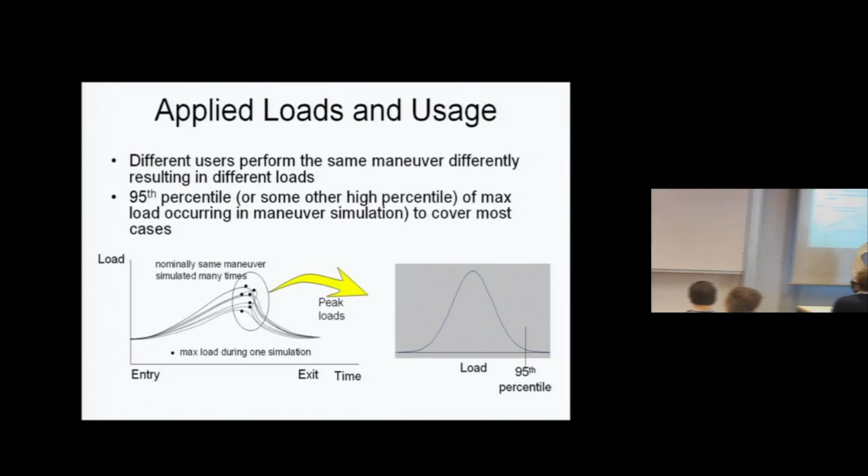Your material, even if it's supposed to be exactly the same day to day coming from the vendor, will never be exactly the same. In fact, you buy it with a specific range in terms of properties, and the vendor guarantees that it stays within these properties, and if it doesn't, you reject it and you get new material and so on. So the raw material in and of itself has some variability because the microstructure is not consistent enough to give you the exact same stiffness, let's say, and the exact same strength.

Manufacturing, especially if it's based on humans manufacturing, involves all kinds of human error in terms of the sizes of the parts and how they are located, the orientation of the fibers. So that introduces error, and there are all kinds of other factors. Even if you were doing it with robots, you still have some variability. So that means you have a scatter in your specific properties, which will include this raw material variability.

But it's also sensitive to, there's also one over there if you want.

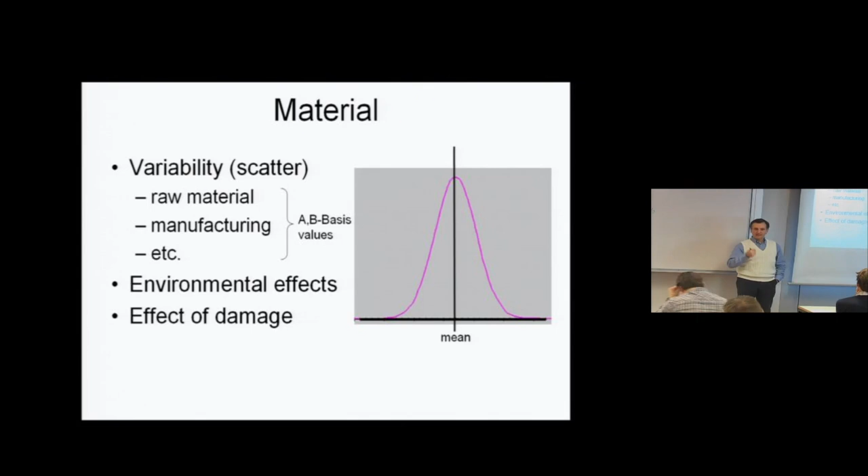It's also sensitive to environmental effects; composites especially are much more sensitive to higher or lower temperatures than room temperature and the amount of humidity that's been absorbed. And of course, what kills everything, or what makes composites not the winner in every case, is the effect of damage. Any kind of damage that in a metal at most would be a little dent with localized yielded structure, in a composite could reduce the strength by as much as 50%.

Obviously, you cannot take the average value, because if you take the average value, then there's a whole bunch of material coming in with strength lower than the average that you could be using, and you had assumed the average value, and obviously you are being unconservative. So there are two values that are statistically defined, the so-called B basis and A basis. And those are the values we use for design.

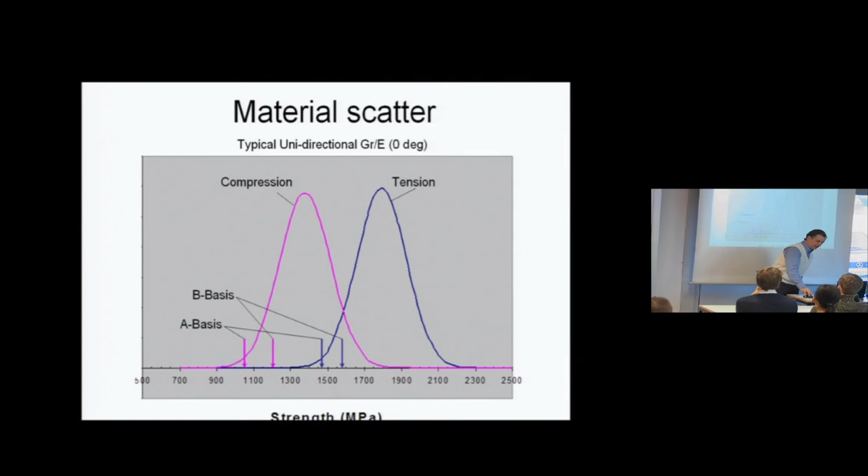And they are, in fact, dictated in the design process by both the certifying agencies and the manufacturers of the design. The B basis is the 10th percentile. Basically, 90% of the tests you would ever do on that material would be higher than that value. And the A basis is the 1 percentile. So 99% of the tests you would ever do would have higher strength.

Typically, the A basis is used for single load path primary structure. So if it's a blade and you lose the blade, you lose the aircraft, then that's an A basis design. If it's a skin stiffened structure and it's just a local failure, you can definitely redistribute the load, so it's like a multiple load path or a slightly redundant structure. In those cases, you would use the B basis. And you will be seeing those in your homework.

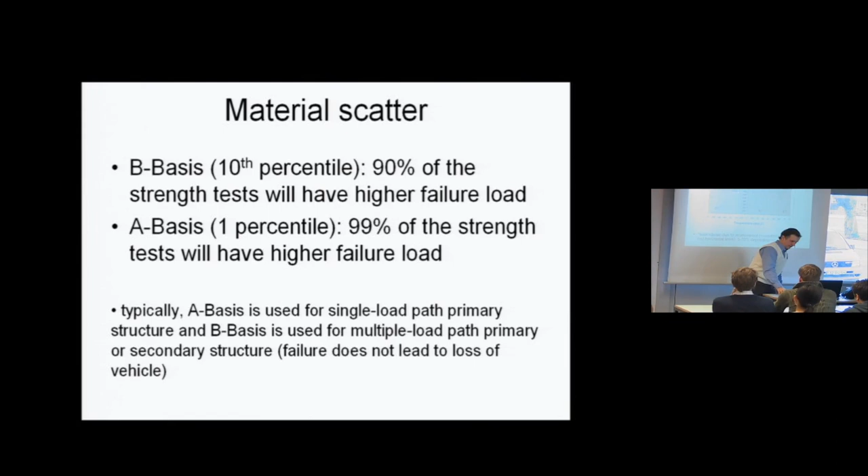When I was working in a program designing an all-composite airplane, the Starship at the time, this was 1984 through 1990, climatic data around the world wasn't readily available. So we actually had to contact the Meteorological Survey of the United States to give us information for the entire world, and we found that the most humid day-in, day-out place in the world is the island of Guam, which is actually pretty nice because it's 85% relative humidity. The only problem is that it stays that 360 days a year, unlike Florida, which can get to higher humidity, but there are some days that are drier.

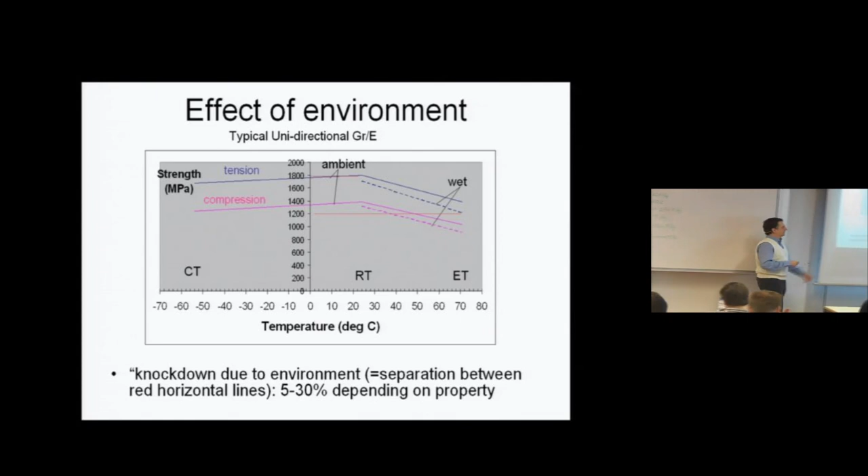So the damage on the other side, anything that you can do to the composite structure will actually affect it. So you can have things like holes drilled on purpose, lightening holes or fastener holes, or by mistake because you dropped some screwdriver and it went through, or some dignitary with very spiky heels walking through the structure with very thin skins. It's happened, and it happens, and you have to design for that. But besides that, you have porosity, basically tiny voids distributed through the structure. You have delaminations, which are bigger voids, that are separation between the layers.

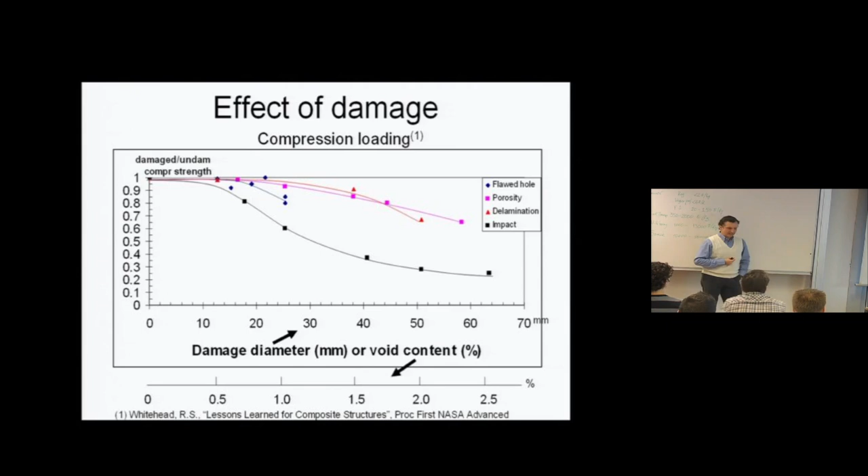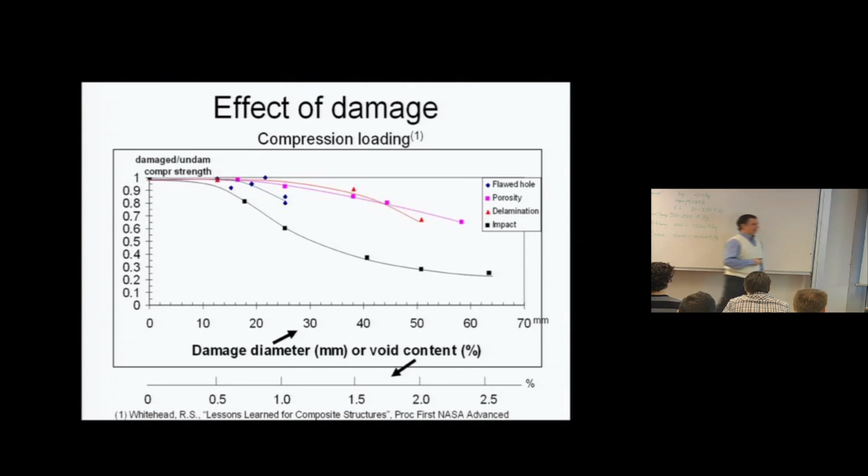And of course, impact. And shown here, the most critical one, this is first generation thermoset composite materials, where the reduction, as you can see, can be down to 60% or more. Newer materials are significantly above this curve, but as a rule, the impact damage tends to be one of the most critical types of damage.

So I now have to design my structure, and I have to recognize that even if it's pristine and perfect the day I make it, assuming the people on the shop floor were careful enough, which is not necessarily always the truth, then I have to account for the fact that it will be damaged during service, and I don't want it to be withdrawn from service immediately every time there is damage. And I have two types of requirements: damage that I can detect and damage that I cannot detect. Because in composites, even damage that we cannot detect, irrespective of the method you use for detection, causes a significant reduction in strength and to some extent also in stiffness.

So if I can detect, we define this parameter, threshold of detectability, and that means that whatever method you chose, it may be able to detect a certain type of damage of a certain size, and if it's smaller than that, it's not reliable enough to detect it. So if you are right at that threshold of detectability, you have to design your structure to take ultimate load, because you have to assume that your structure at some point during its life will actually have that damage in it. And because you cannot see it and repair it, you have to live with it, which means it becomes an ultimate load requirement.

Typically, the inspection method or the detection method is based on visual inspection, which is another interesting story. How many people looking at the same thing will arrive at the same conclusion in terms of, oh yeah, I can see the damage there and it's about that size. But that's what we have to live with. So if you choose that the inspection method is visible, then it's barely visible impact damage. So ultimate load for that, and limit load if it's visible damage.

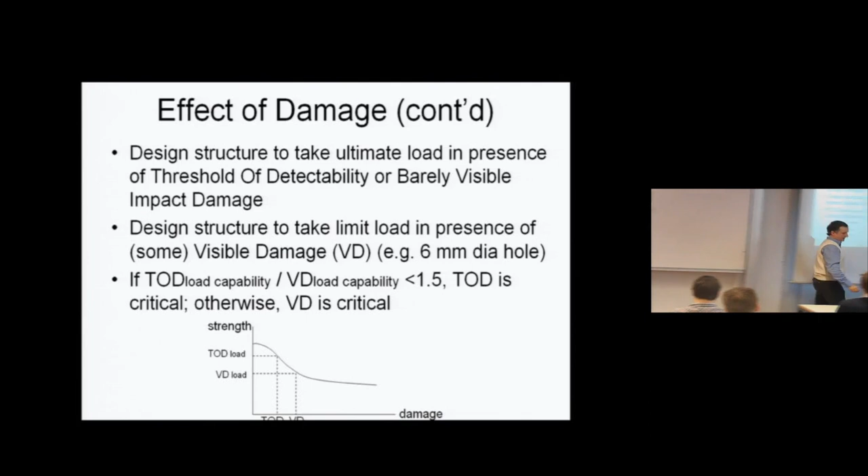So you have to account for both, because sometimes if you design for limit load with visible damage, the knockdown at the limit load is bigger than multiplying that by 1.5 and comparing to your ultimate load. In other times, if you design for ultimate load for barely visible impact damage, then if you reduce by 1.5, you actually are already below limit load, so that is the driver. So you cannot do one of the two and assume you cover the other. You typically have to check for both limit load and ultimate, threshold of detectability, and visible damage.

So if I take everything together, I will completely destroy this wonderful material that has these excellent properties. Basically, my strength at room temperature ambient and damaged is somewhere out here. And that's the mean value. Now, I have to reduce this from here to here, 5 to 20%, to account for the worst environmental effects. 5 to 20 depends on the property, depends on the material, depends on the environment you are taking into account. So you're down here, and then you further reduce it to include the worst type of damage. Typically, it's impact damage. And that gives you the mean strength accounting for environment and accounting for damage.

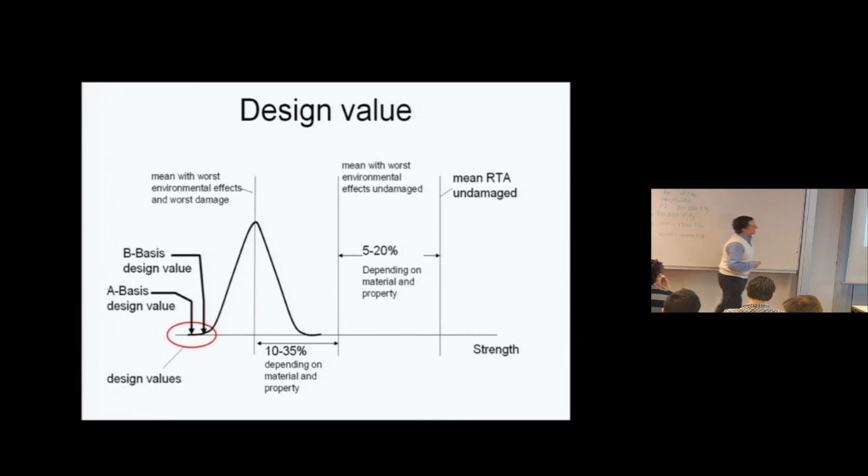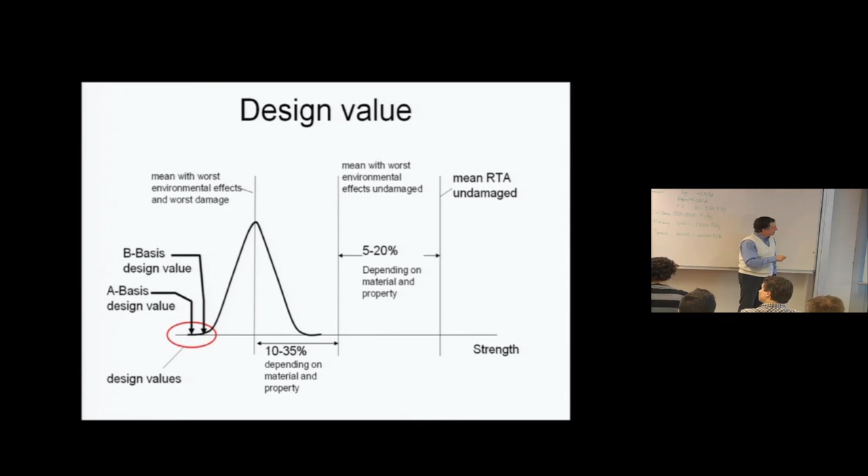And then around that, we have the distribution. We said the material scatter has a certain distribution, and we'll have to go down here to use either the B basis or the A basis design value. So from here to there, materials which compared to steel would be no contest, would be the best materials in the world, all of a sudden become comparable in some respects.

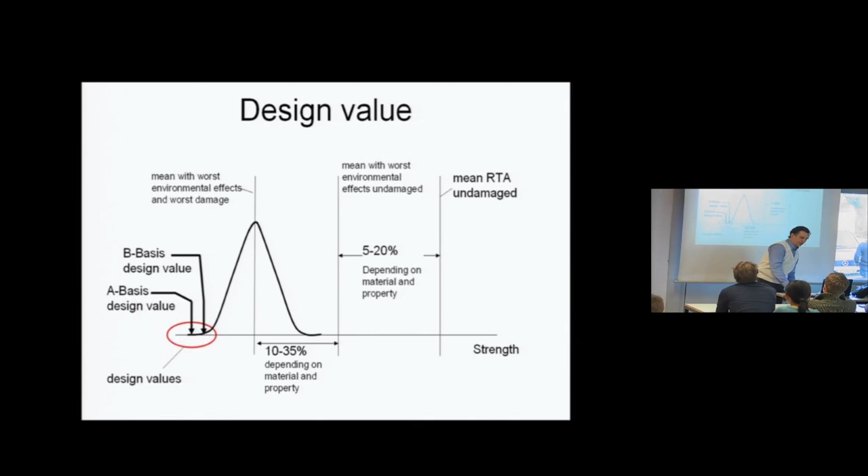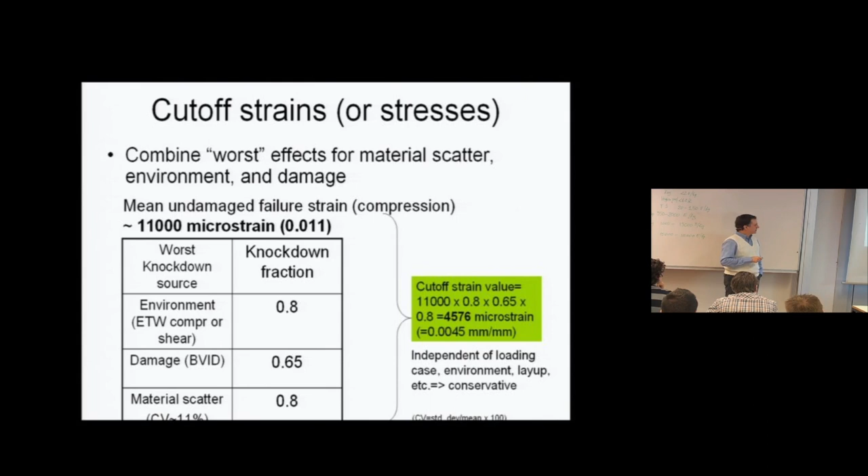And to translate this to numbers, a typical material has a mean undamaged failure strain in compression of 11,000 microstrain, or 0.011. So if I apply typical knockdowns, these are typical, so don't take them for granted, even though you will see that almost everybody uses these, at least for preliminary design. For accounting for environment, we have 80% as the multiplicative factor, or a 20% reduction. Accounting for damage, barely visible impact damage, we multiply by another 0.65, or a 35% reduction. This is for the newer materials, not the first generation thermosets I just showed you, which are not as good as this. And then the material scatter to give us the A or B basis.

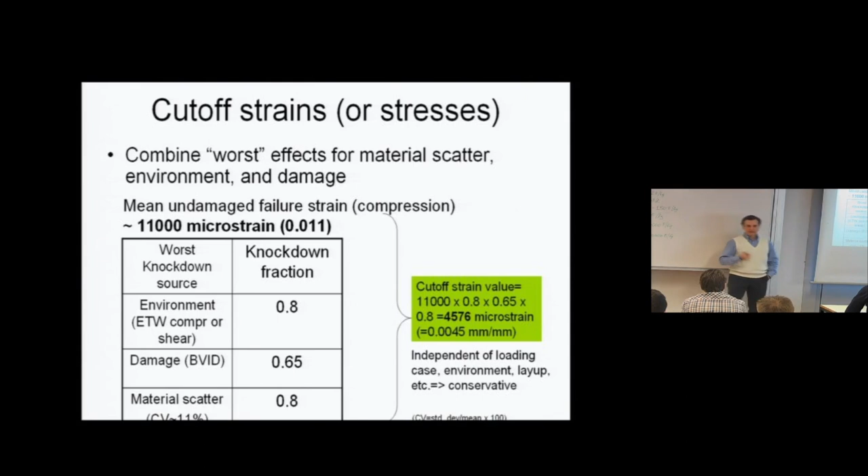This assumes a coefficient of variation. This at the bottom left here is meant to say CV, coefficient of variation of 11%, which is a bit on the high side, but it's good to cover most cases. Gives you another multiplicative factor of 0.8, or a 20% reduction. So if you take all these three together and you multiply by this 0.011, you will find 4,576 microstrain. And if you go and look, ever since the 70s, the typical cutoff strain values being used in composites were 4,500 microstrain. So there is a reason which is very much strongly related to this.